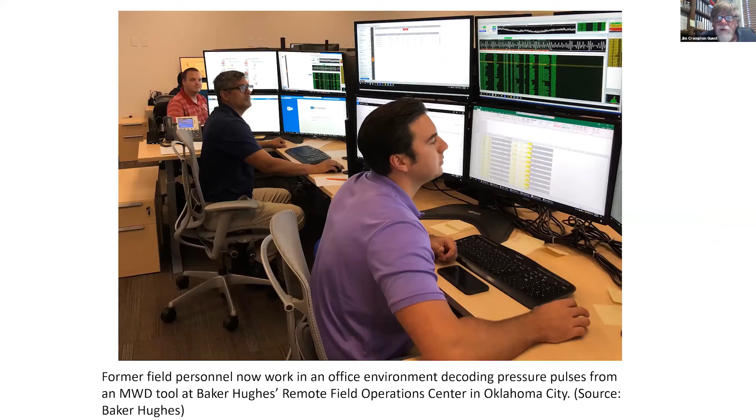Or maybe the hurricane changes and you can operate continuously during that whole period of time when there's no human beings on the platform. So this connectivity is an important part of it, and the digital intensity is an important part of this digital oil field. You'll now find an awful lot of petroleum engineers spend their day in front of computer screens. The younger ones like that, the older ones don't. Or it's not just an age-related thing. Obviously, some people really like working in this sort of environment, and we're working from home and working remotely with the office.

We can take this data and put it in your living room or your bedroom, or we could put it in your truck as you're driving around. So we're able to connect people with data wherever they are. You could take it with you. And it's not only that the data is pumped to the operator, the data is pumped to the oilfield service contractor as well, as they're beginning to understand what's really going on in the field. So you're getting a more realistic surveillance of what is happening in the field, but you're doing it remotely, wherever you might want to be.

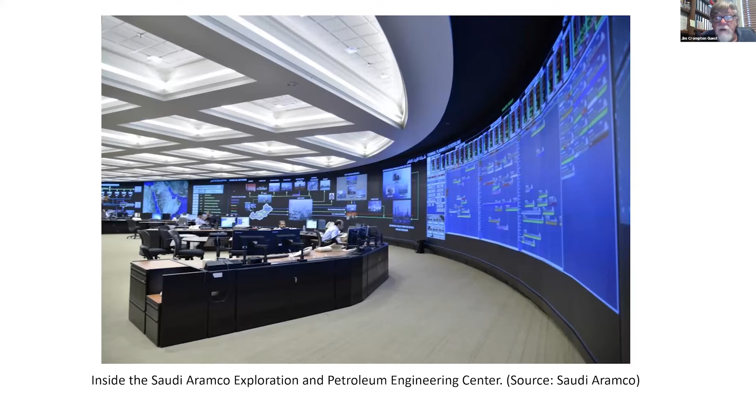Well, as Dr. Miskimins said, a lot of this stuff isn't brand new. You hear a lot of marketing hype from tech vendors: here's my brand new thing, just buy my kit and you'll be digital. Well, a lot of this has really come from decades of experimentation and decades of evolution. The oil companies aren't always known as the most rapid adopters of digital technology, like an Amazon or an Uber. We may not be going as fast as e-commerce or e-banking or a lot of other areas.

But there is a conservative nature to make sure what you put in is safe, what you put in adds economic value. And so the adoption of digital technology has been slower, but it's been more careful and more thoughtful, I think. And the idea of a smart well isn't just fiber optics down a well to gather information like Dr. Miskimins was talking about, but it's actually something where I can get the information and understand what's happening in the reservoir. In this case, maybe I'm water flooding a reservoir, and monitoring the water oil ratio.

And maybe I realize in sand A, all of a sudden my water cut is 80%, 90%. What I really need to do is stop injecting water into that reservoir and close it off. Instead of doing a well intervention, I'll just use one of these actuators with these moving sleeves, and I'll shut off zone A. And then with my injector-producer pair or pattern, I will start putting water in zone B or zone C.

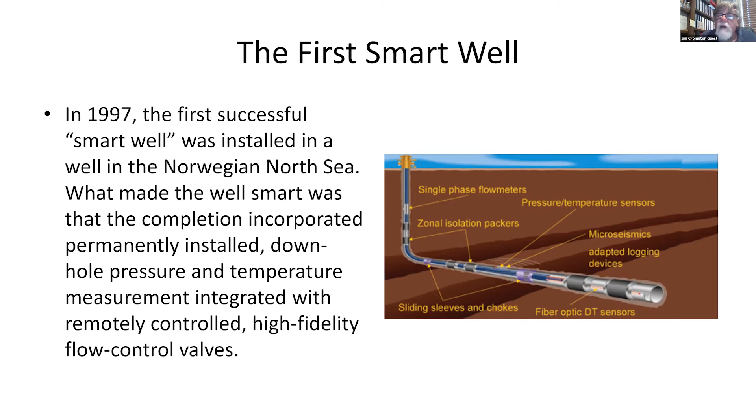But the accuracy and the precision of the drilling in these sort of cases is critical. And how do we do that? Well, we do it with more data available, and we have the measurement while drilling, MWD, maybe a couple drill stands above the drill bit. And we have LWD, logging while drilling units, to help us understand the rock we are drilling through.

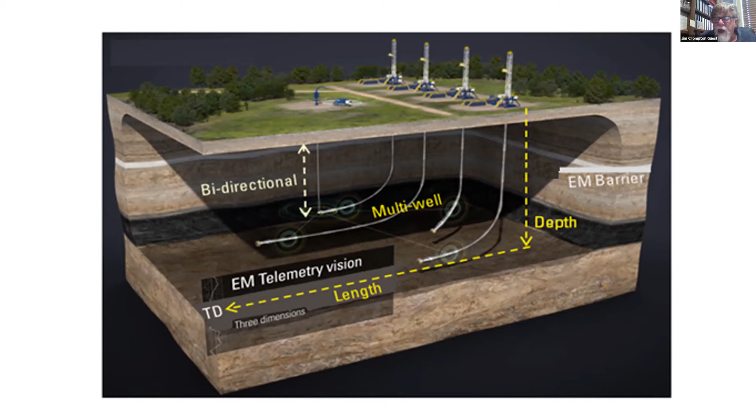And directional drilling has really been advanced because of digital oil field technology and advances. Well, we're still waiting to drill the perfect well, but we're drilling better wells. And the drilling learning curve, often called the drilling factory, essentially we are learning from the last well to drill the next well better. And we're doing it through gathering a lot of information.

And we get that information to go into our computer models to produce better designs and then produce better results as you go through this. And that's kind of expected. And operators depend on contractors getting smarter, and smarter means more efficient, less cost. And we're also comparing drilling to completions, to production, to reservoir management across the entire value chain. We are able to figure out not just drilling a better, cheaper, faster well.

I want to drill a well and I want to hydraulically frack it in a way that I produce more oil. And we know these unconventional wells decline very, very quickly. Within a matter of months, you're putting it on artificial lift. And even then, you still have decline curves that are 3 or 4 times that of a conventional well. So do you have to keep drilling all the time in order to keep up your production? Can you look at these wells and have refrac candidates?

An awful lot of it, again, has to do with the information that we are collecting, which allows us to build better models, which allows us to have a more efficient and effective and hopefully safer operation, and one that has a lesser impact on the environment as well. Because clearly that's important to operators, to the industry, to the community, and we are required more and more to operate in a cleaner way.

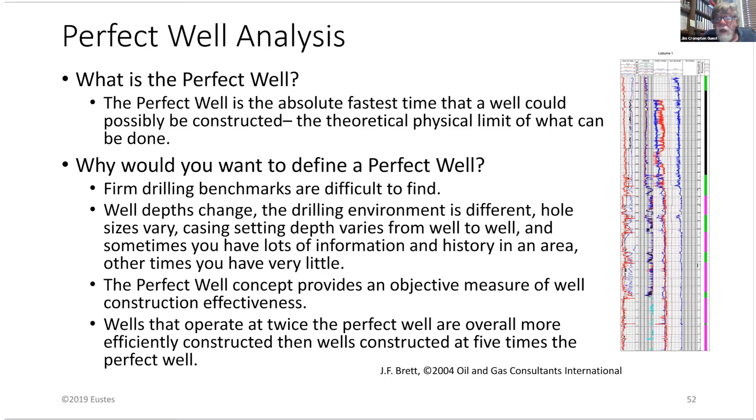Clearly there are some areas, West Texas, Western Pennsylvania, and other places, where we are wearing out local county roads. How can we do this more efficiently? It's one of the reasons that led to pad drilling, where instead of drilling one well on this site, we may drill 8, 12, 16 wells on this site and not disturb the equipment.

So this almost becomes a logistical challenge too, so that we're not only drilling a good well and fracking a good well, producing it for as long as we can, we're actually trying to figure out how to do all of this massive operation more efficiently.

And that leads to, you see all this equipment, there's probably a dozen different contractors that are working for the operator on the site, and the coordination from the logistical aspect is another challenge. And even road traffic, and even directing well inspection, lease operators, and drilling well intervention crews. It has become an on-the-surface ground logistical challenge for our operators.

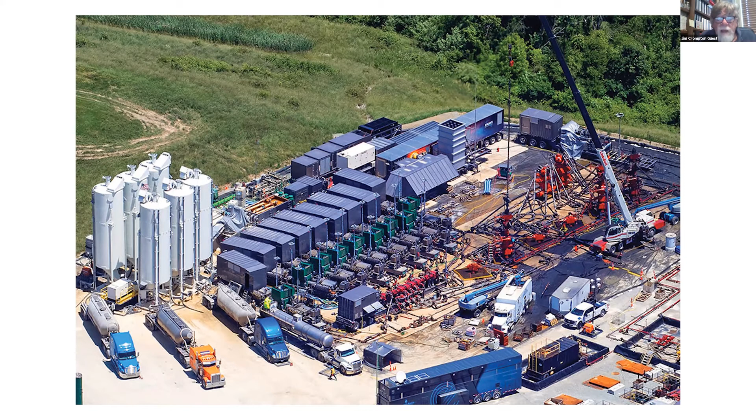Well, we want to end up with something like this. We have hopefully a minimal disturbance of the land surface with the maximum number of wells that we can drill. And while it looks like we may be only operating on a couple of acres of land here where we've disturbed, we may be going out with the reach of the horizontal wells and being able to tap the potential of a lease that may be several sections or more, when we talk about thinking about this not just as a single well, but as a whole cube of rock that we're trying to maximize the potential for, yet minimize the cost and minimize the impact we have on the environment.

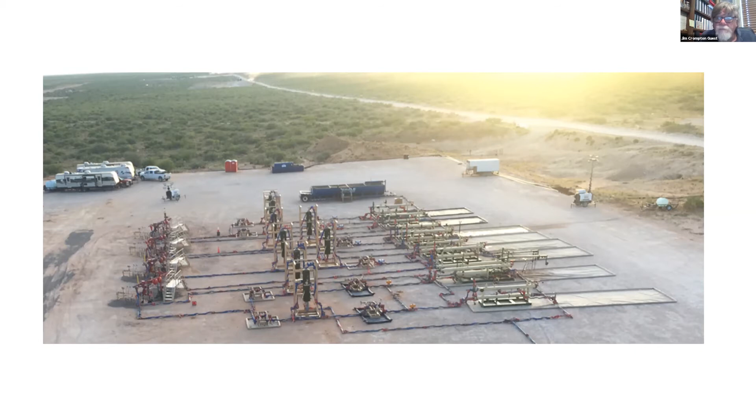And yet, I can not only get the visual range of inspection, I can put other sensors on that drone, and I can look at thermal signatures, I can look at chemical signatures, I can learn a lot more and augment the role of the human being through some of this new technology. And regulators, you guys are using it for obvious reasons to improve the efficiency of your inspections. Operators are doing the same thing. This is another good use of the technology plus the human being, leading hopefully to a safer operation.

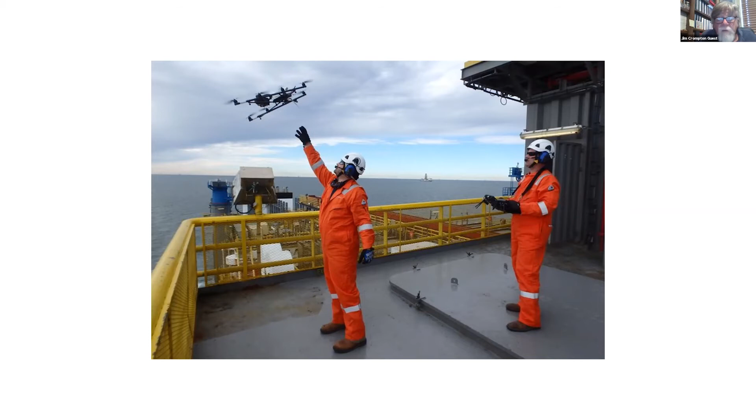Well, we could take this all the way to, do we have to have human beings on the platform at all? Offshore example here in the continental shelf of Norway, a country that is leading an awful lot of the adoption of these technologies. This Valemon platform is not in deep water, it's in medium-sized water, and it's not a super giant field, it's a medium-sized field. But essentially, the operator, Statoil, now called Equinor, the state oil company of Norway, has taken all of the control functions and facilities off of the platform and brought them on shore. And the human beings come to work at regular office hours, or with different shifts, but they are in remote control of the operations from the field.

And you're going to see more and more of this offshore, what's now called minimally manned or normally unmanned facilities, where we're starting to take people off. And when we take people off, we can take iron off, and we can take capital costs out of operations. Yet still, you have to operate this. And one of the maybe counterintuitive things from the experience we have on these facilities is that we can actually operate them safer. The safety statistics are actually better than the normally manned facilities. And that's been demonstrated in Norway and the UK and Australia and a number of other countries.

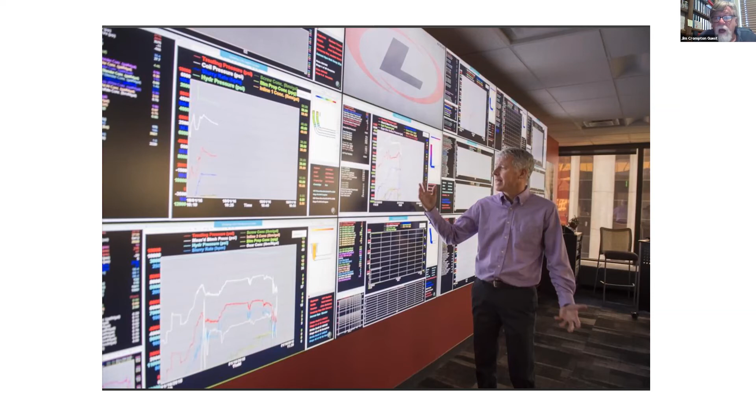Well, clearly, most of this investment's been made to improve production, to understand and lower operating costs, to try to lower capital expense, and lower the LOE, the lease operating costs, with maybe fewer human beings as part of the operating practice in the oil field. But we can extend this to safety and to the health of our operators. Taking human beings away from dangerous positions is a real win from the safety perspective.

And now it's moving into monitoring the environment. Most of our field automation systems were really set up to monitor the production practices. We are now augmenting that digital oil field technology, and we're going after the sensors that will look at air quality, that will look at methane emissions, not just the flaring we do on a permitted basis and the venting we may do for a safety upset, but maybe we need to go into a continuous monitoring mode and have a better idea of the environmental impact on air and water.

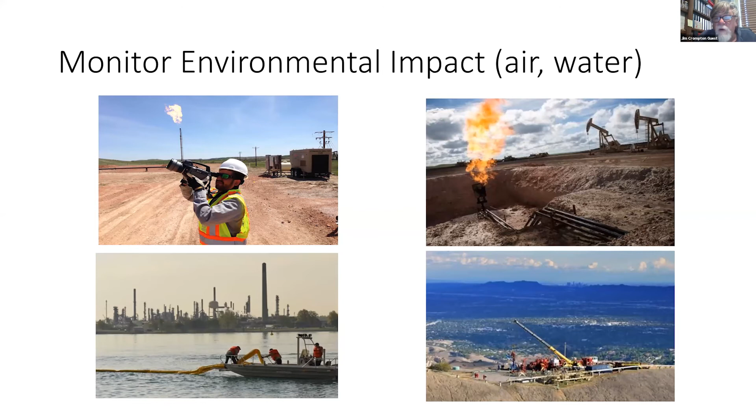Well, just one example, and there's a number of companies. I don't want to pick out just one in particular, but this is a company in Colorado, Project Canary, that is working with the School of Mines, our Payne Institute, and we're able to have continuous monitoring, not just of the pressure and temperature that we normally look at, but air quality. These sensor platforms, through Internet of Things technology, we can connect them to the cloud, send them back to the data center, do our processing, and do a much better and quicker job of understanding where there might be leaks.

And oftentimes, it might be just a very simple equipment repair, or it might be a change in work practices of how you're loading up oil into a truck to take it away. It is doing all of that so that we can get cleaner, and we can demonstrate to the community that we are indeed paying close attention to this aspect of the operations.

Well, the oil and gas industry today isn't inventing most of this technology. It's a challenge of adaptation rather than invention. A lot of this technology is coming from everywhere. Augmented reality, from gaming. You talk about one of the guys playing too many video games. We're now playing video games in the oil field about operating procedures. We're having to have connectivity all around the facility. We're trying to bring that information back to the operator, the connected worker, or even having the algorithms be a virtual assistant, Siri for the oil field, helping us to remember all of the important things that are going on.

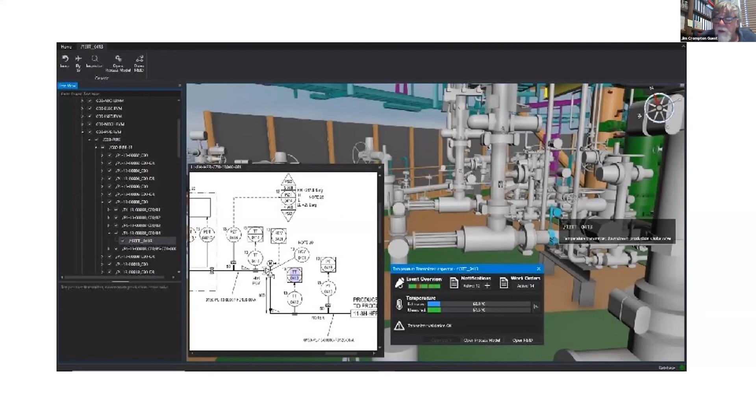One of the things that Colorado School of Mines is really talking about is the next generation workforce, the next generation of petroleum engineers. And what we are doing, what we didn't do back when I was in school, is this digital literacy is becoming a very important part of what we teach.

The students that I teach are mostly seniors and graduate students, but they are already proficient in statistics and in advanced analytics. They all have Python programming courses, and essentially, they are all as comfortable with the digital side of this industry as they are with the physics side that are taught in the traditional sort of courses.

And now we're reaching out online to get to experienced engineers that maybe missed some of these classes when they were in school, and now they can get them through online graduate certificates. But we have a lot of challenges. This isn't easy. The integration of all of this information, the visualization is not easy.

And the whole idea of how does the human work with the machine, work with these computer models, and how do we work together a lot more cooperatively and a lot more efficiently as we go through this. Some people are worried, is artificial intelligence taking over the world? Well, the answer is it is, and we're going to have to learn how to deal with it.

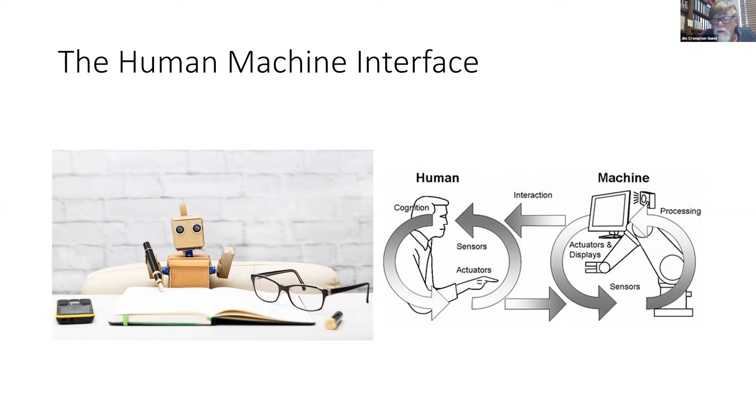And these digital twins, these models of our facility, they're becoming richer and richer. So it starts with a piece of equipment. Then it goes to an entire wellhead and processing assembly on the surface. Then it extends to the wellbore itself and all the things happening in it. And finally to the earth, in the subsurface, the reservoir itself.

And a lot of this, we don't understand the physics completely, but we have an awful lot of data, so we can build models from the data itself. And it's physics and statistics that are building these models that are increasingly useful in how we are managing the digital oil field. So I'll stop there.

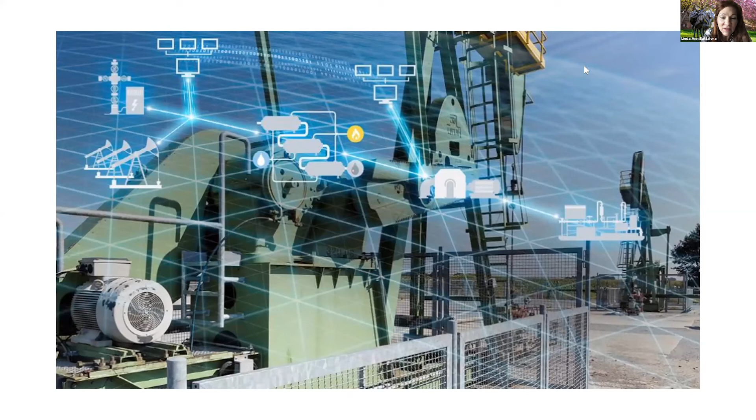It's the old saying, if you can't dazzle them with your brilliance, you baffle them with your bullshit. So I guess I succeeded one way or the other.

Jim, this is Jason from North Dakota. What coursework would you recommend that high school students get into in order to be proficient with the information that you're promoting? That's a really good question.

There's a couple of things that we're trying to do in the Petroleum Engineering Department, and we've got a lot of support, not only from Dr. Miskimins, our department head, but her bosses within the school. One, it's a physics and digital literacy challenge. Mines offers a data analytics minor within petroleum engineering, in which they have to take courses in computer science as well as in statistics, and then a couple of advanced courses we call petroleum data analytics, on how you apply all of this within the traditional physics background.